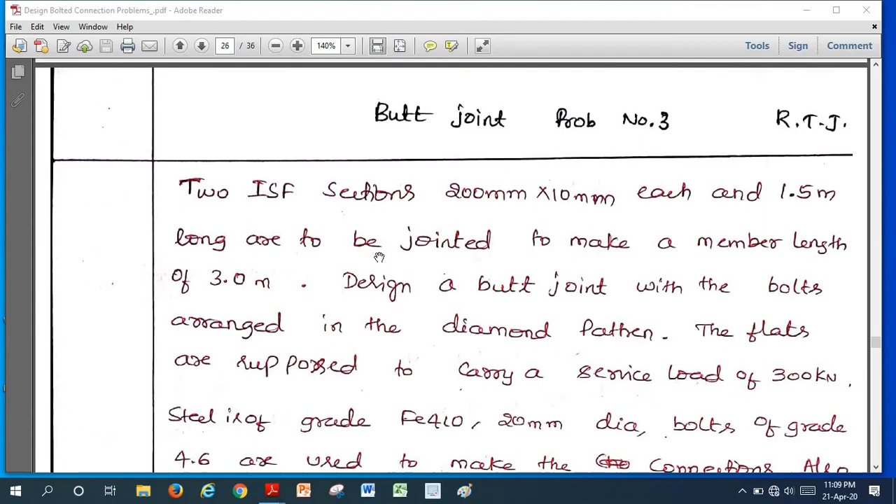Today we're going to discuss problem number 3 on butt joint. This is actually a design problem.

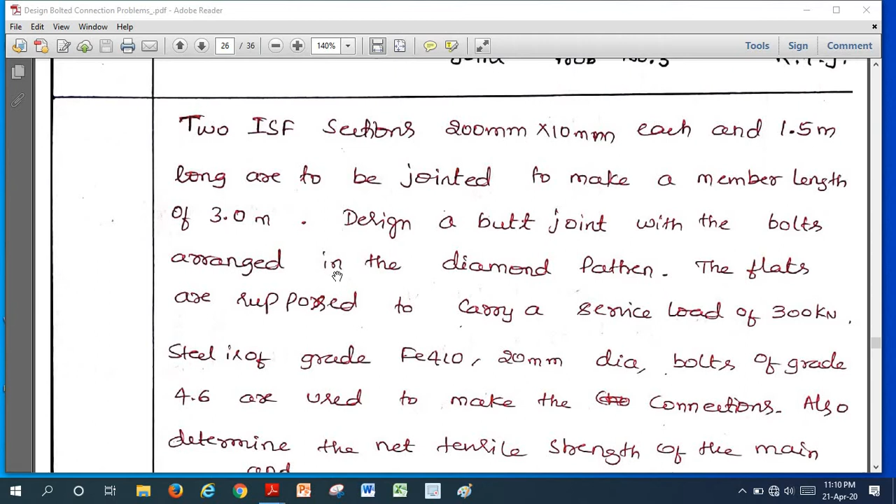Here is the problem statement. Two ISF Indian standard flat sections, that is plates, of dimension 200 mm width and 10 mm thick each, and 1.5 meter long, are to be jointed to make a member length of 3 meter. Design a butt joint with bolts arranged in diamond pattern. The flats carry a service load of 300 kN. Steel is of grade Fe410. 20 mm dia bolts of grade 4.6 are used to make the connections.

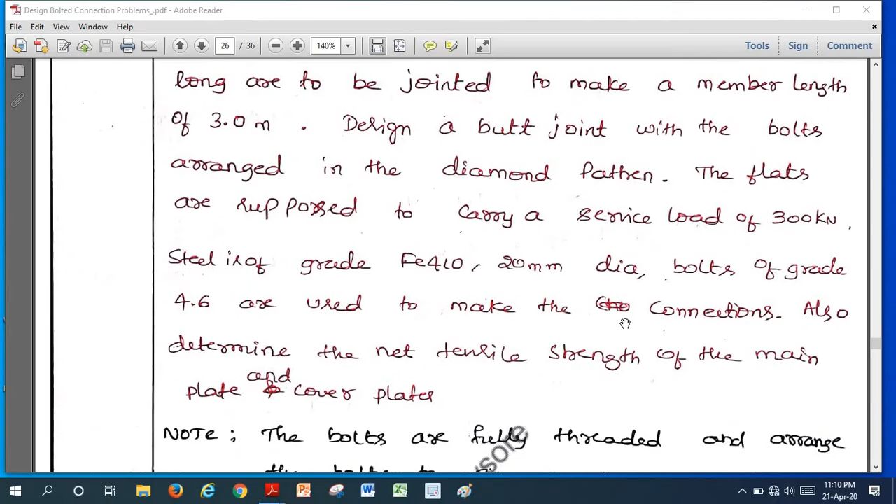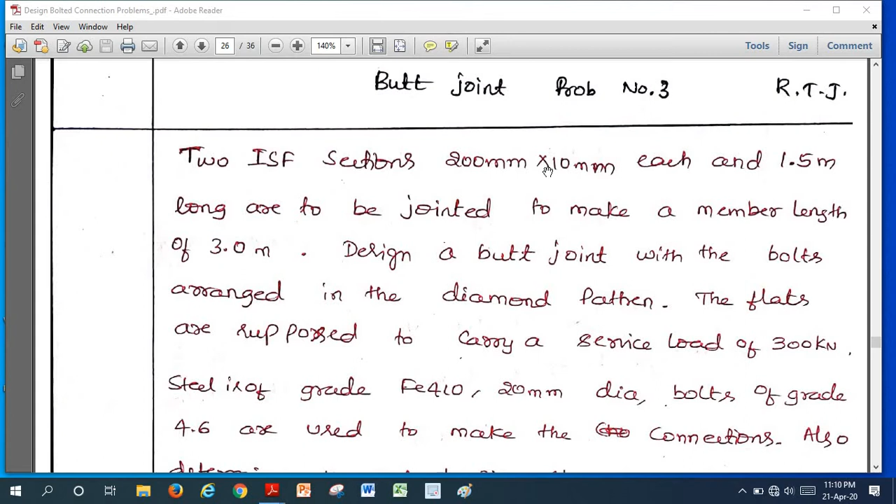Also determine the net tensile strength of the main and cover plates. This is the design problem where they intend to connect or join two Indian flat sections of dimension 200 into 10 to make one element using double cover butt joint.

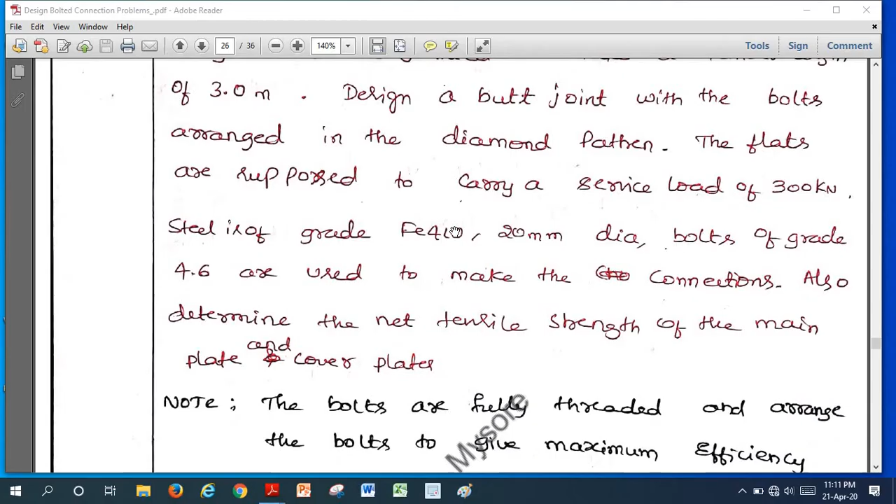We need to arrange the bolts after designing, calculating number of bolts, pitch and everything, in diamond pattern. Diamond pattern gives maximum efficiency. In the last problem we arranged the bolts in a rectangular pattern. If you arrange them in diamond pattern, it gives maximum efficiency to transfer the maximum load from one section to the other.

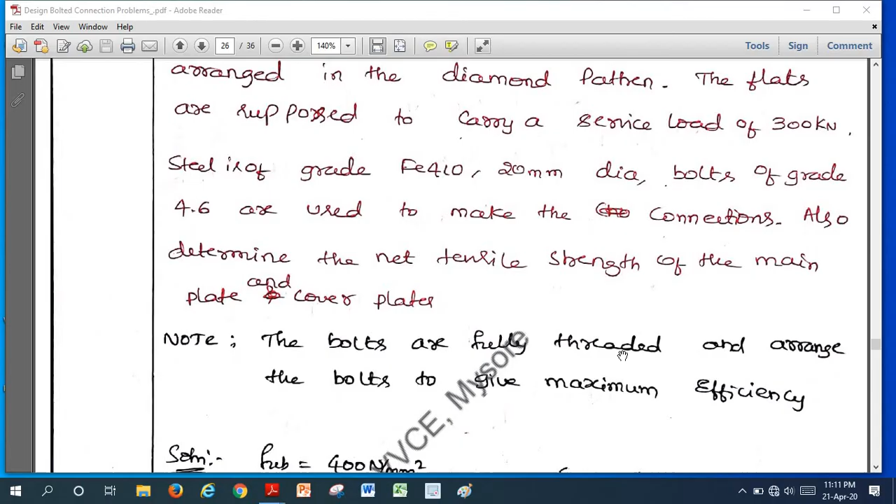Here they note that the bolts are fully threaded, meaning there is no shank portion. While calculating shear capacity, we should take NS as 0, and we should arrange the bolts in diamond pattern to get maximum efficiency.

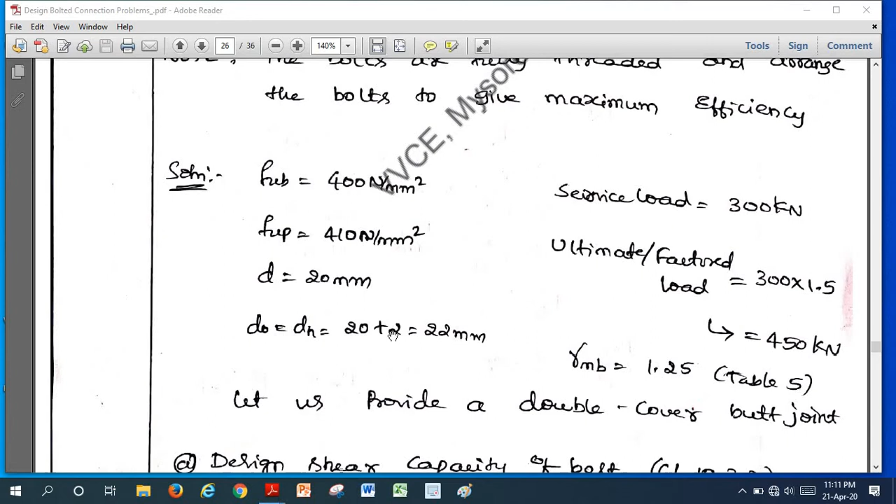If you write the given data: bolt grade 4.6 gives 400 Newton per millimeter square, Fe410 steel gives 410 Newton per millimeter square, diameter of the bolt 20 mm, diameter of the bolt hole - if you look at table number 19, you get clearance, which gives 22 mm.

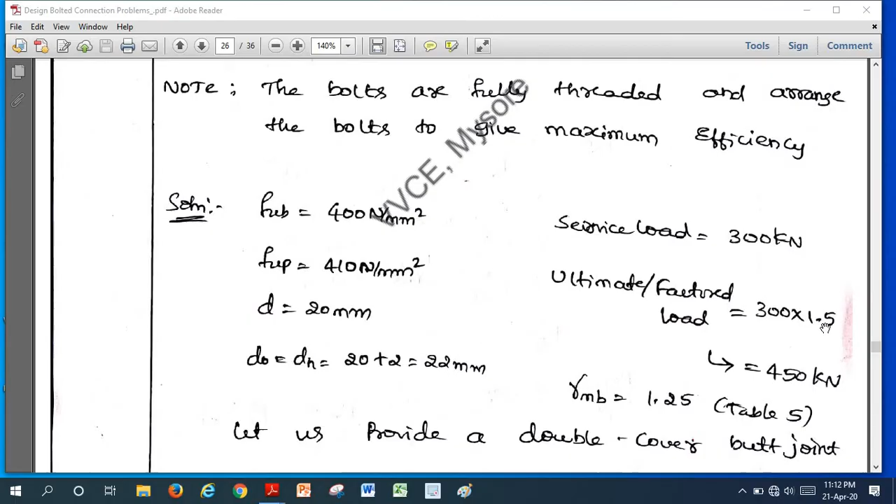Here they give service load or working load. We need to multiply by load factor, the partial safety factor for load, that is 1.5, to get ultimate or factored load. Service load into 1.5 gives the ultimate load. For this load we need to design the connection.

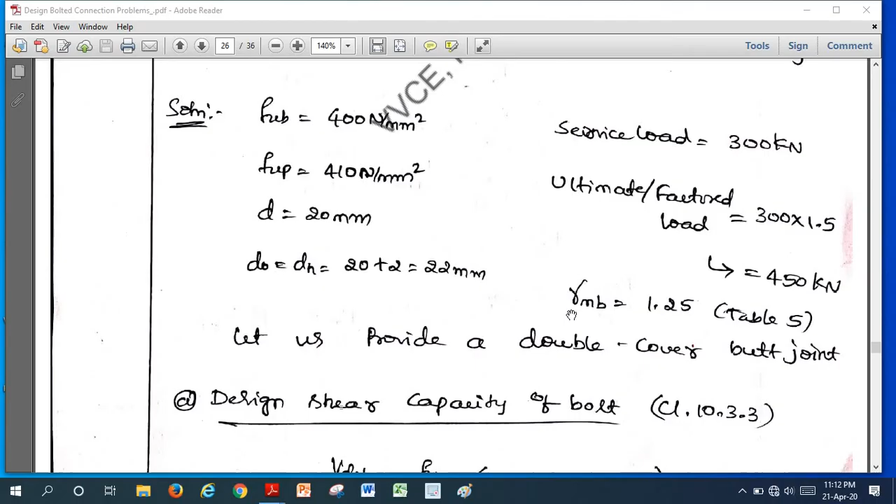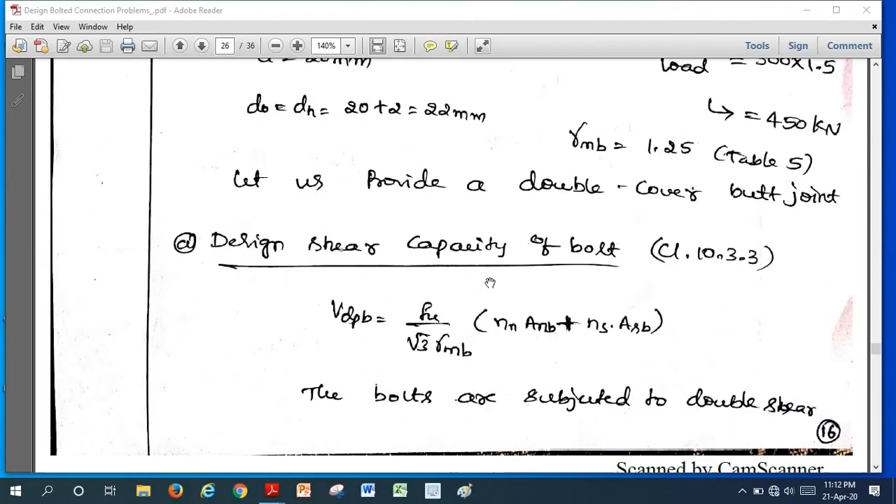Gamma MB is 1.25, we look into table number 5 of IS 800 2007. Now I have decided to provide a double cover butt joint here. So to design any joint, we should know the bolt value first, that is the capacity of a single bolt.

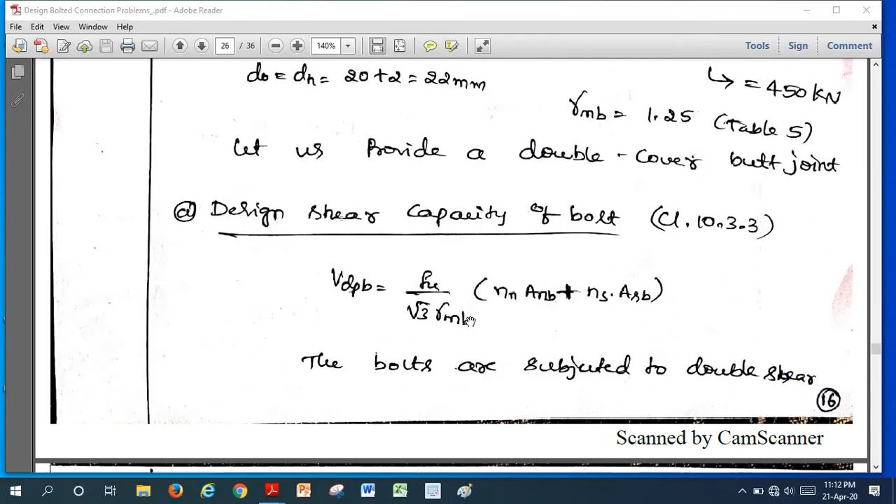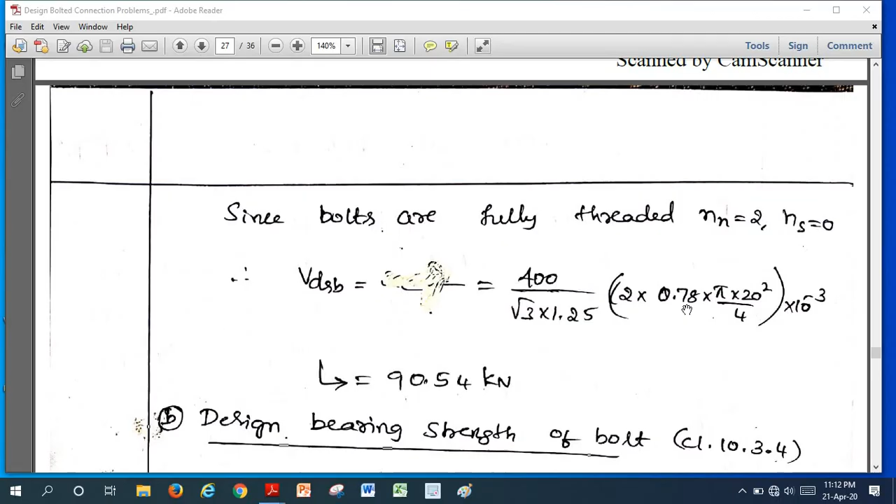Similar to the last problem, if you calculate shear capacity of the bolt according to 10.3.3, here is the formula. The bolts are in double shear, so we take n equal to 2. Since the bolts are fully threaded, NS becomes 0. If you substitute the values for Anb, 78% of Asb, Fu by root 3 gamma MB, you get 90.54 kilonewton. This is the single bolt value in double shear.

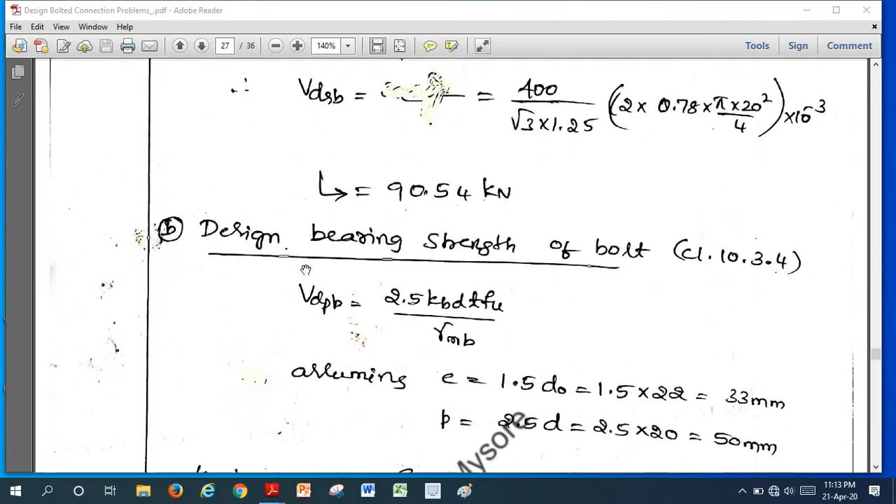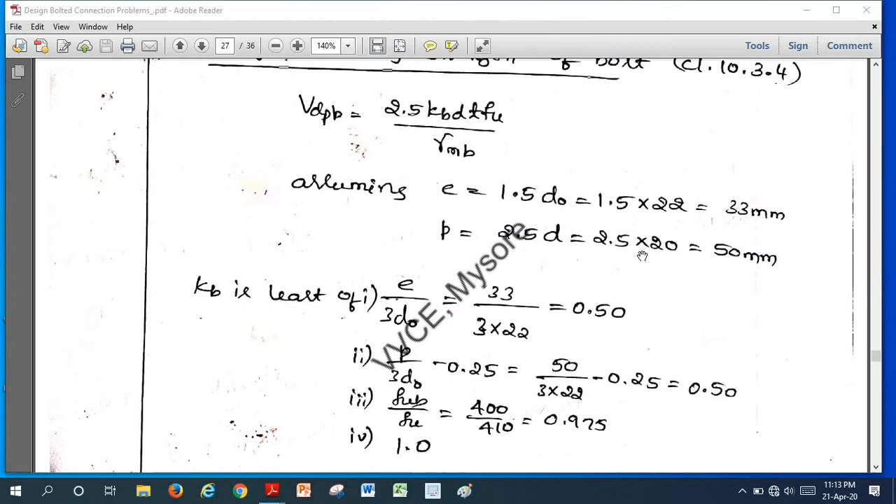If you calculate bearing strength of the bolt according to clause 10.3.4, here is the formula. We assume e as 1.5 times D naught, pitch as 2.5 times D according to the code. If you calculate Kb, it is the least of these four values, which comes out to 0.50.

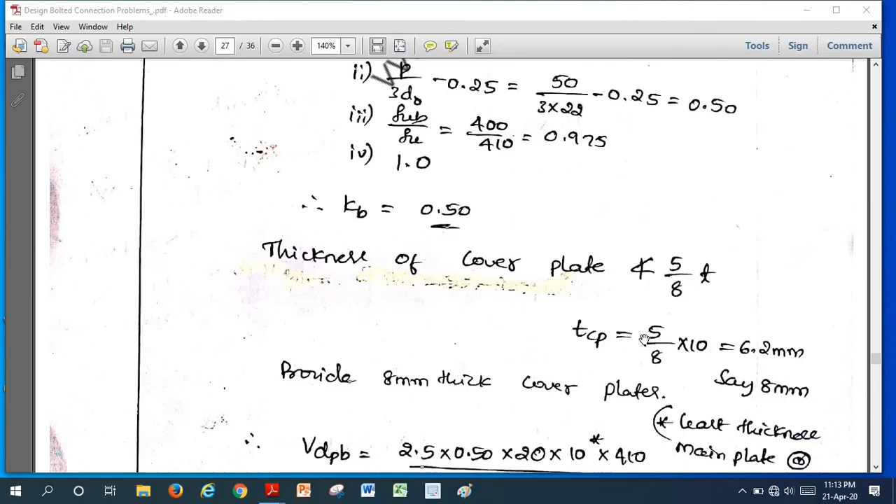Since we don't know the cover plate thickness, we should provide it such that the cover plate thickness is not less than 5/8 times the thickness of the main plate. Main plate here is 10 mm, so if you calculate, you get approximately 8 mm cover plates.

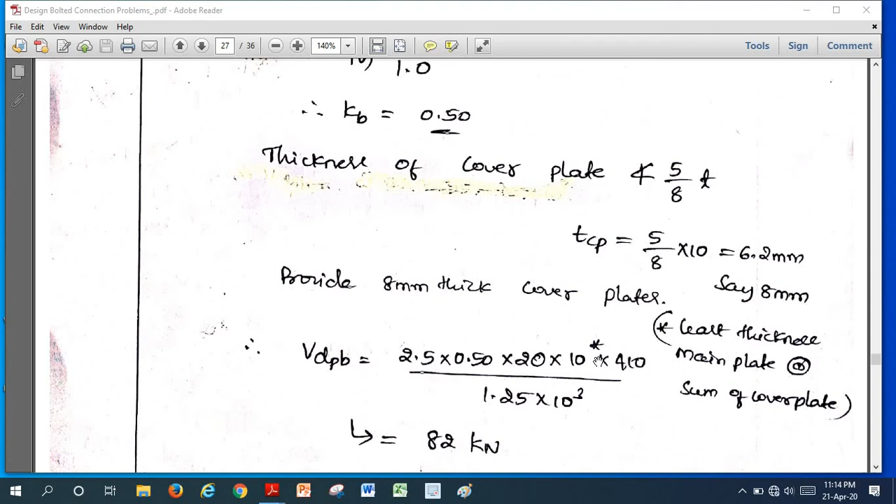We need to provide cover plates above and below since we are providing a double cover butt joint. If you substitute in the Vdpb formula, 2.5 kb diameter t, here we should take the sum of cover plate thickness or main plate thickness, whichever is least. Main plate thickness is 10 mm, cover plate thickness is 8 plus 8 becomes 16. Therefore we need to take the least value, that is 10 mm.

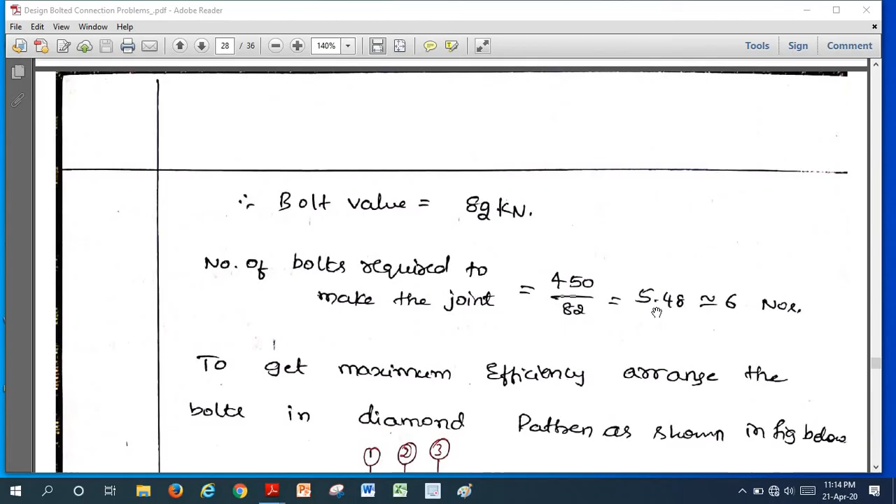So we get 82 kilonewton. Now the bolt value is the least of the two, shear strength and bearing strength. Here the bearing strength is 82 kilonewton. Therefore number of bolts required to make the joint is factored load divided by bolt value, giving 5.48, say 6 numbers.

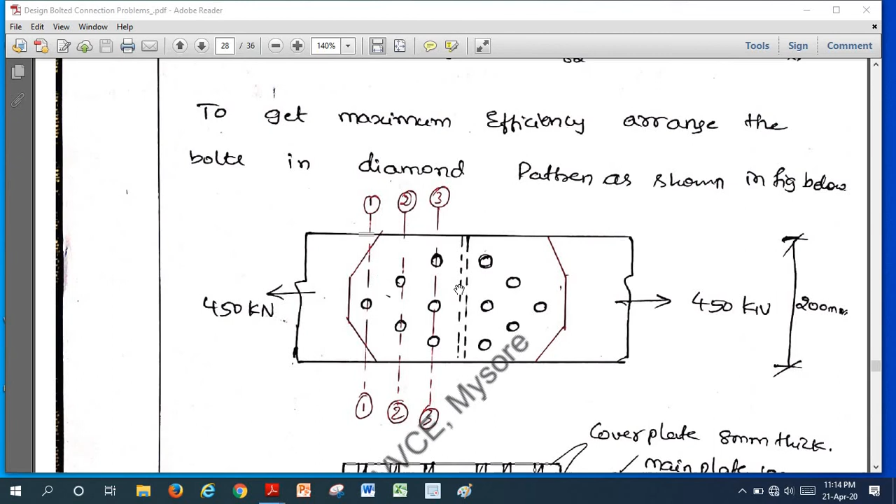Now to get maximum efficiency, we need to arrange the bolts in diamond pattern. These 6 numbers we need to provide for the half section of the joint. Total we need to provide 12, if we club both sides. The value we calculated, this many bolts, we should provide on one side, that is 6 bolts in diamond pattern. This is the cover plate, this is the main plate.

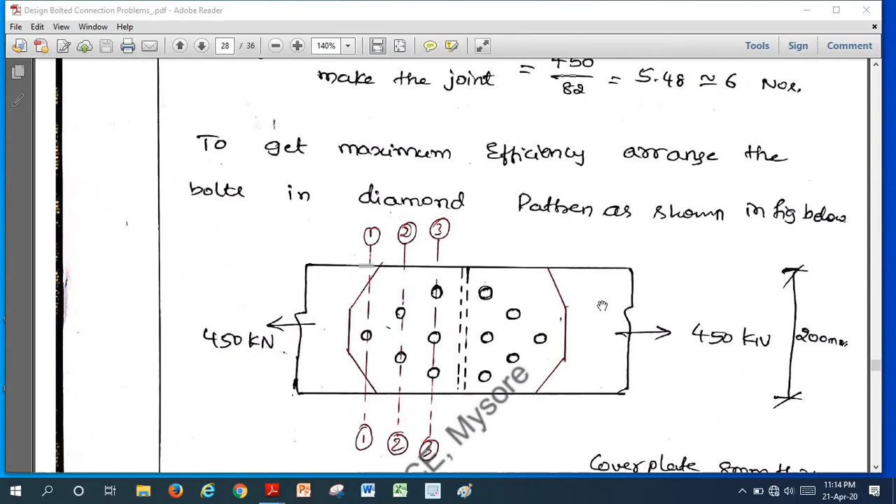The width of the main plate is 200 millimeter, the given thickness is 10 millimeter. In this other view, I have provided 3 rows of bolts with 6 numbers. Now this is the design.

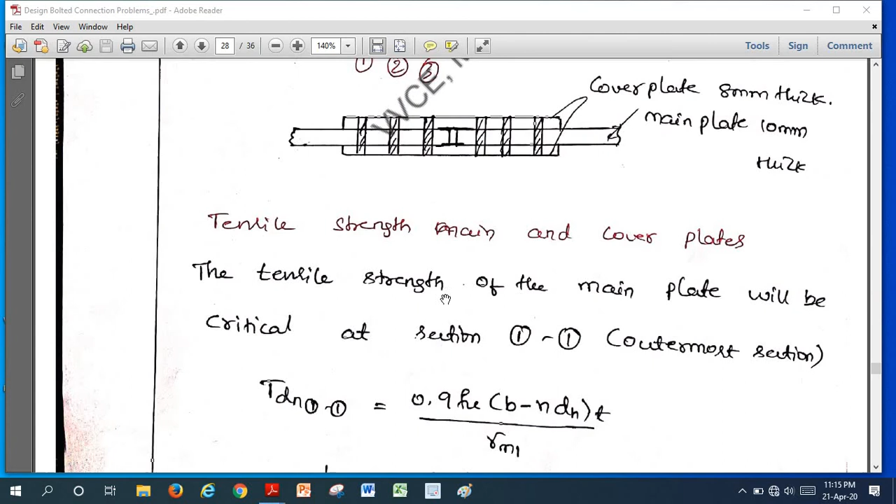Since they asked for tensile strength of the main and cover plate, the tensile strength of the main plate will be critical at section 1-1. For the main plate, this section is critical. Therefore, if you calculate tensile strength there, we know the formula according to 6.3.1 of IS 800 2007: TDN equal to 0.9 FU AN T by gamma M1.

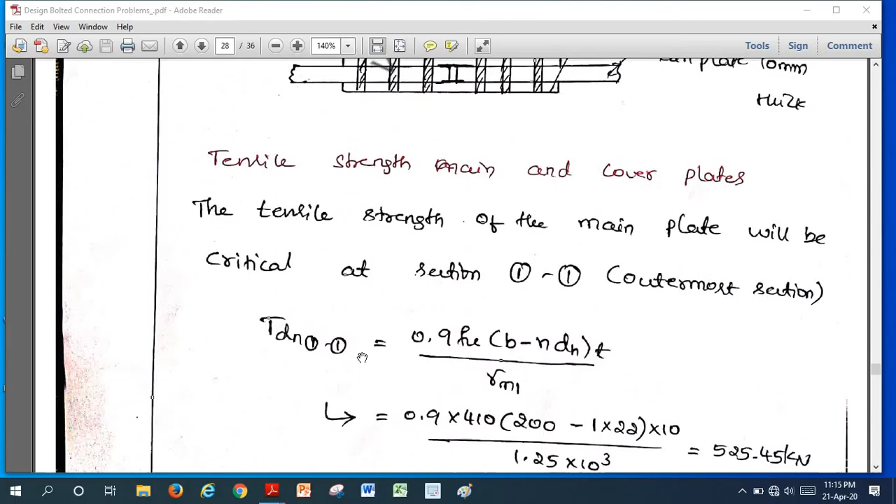AN is B minus N times DH, B is 200, N is the number of bolts passing through this section, only 1, and diameter of the bolt hole is 22, thickness of the main plate is 10 mm. Therefore we get 525.45 kilonewton.

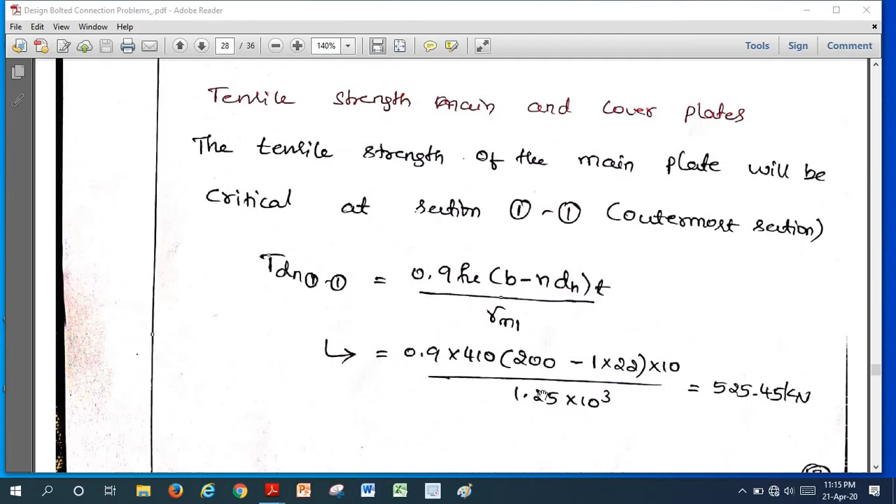We should take gamma M1 from the code book again, table number 5. Now, if you calculate the cover plate tensile strength, the cover plate is critical at section 3-3. This section is critical because they have removed 3 bolts' area here. So if you come to the main plate, it is very strong at 3-3, weak at 1-1.

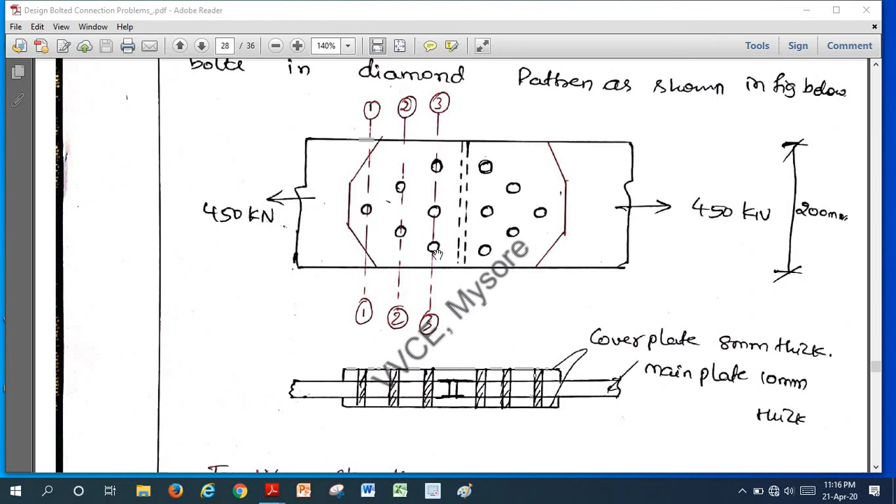Whereas the cover plate is critical at section 3-3, and the cover plate is strong at section 1-1. So here we should consider 3-3. Number of bolts passing through this section is 3. Therefore N becomes 3, diameter becomes 22, width of the plate is 200.

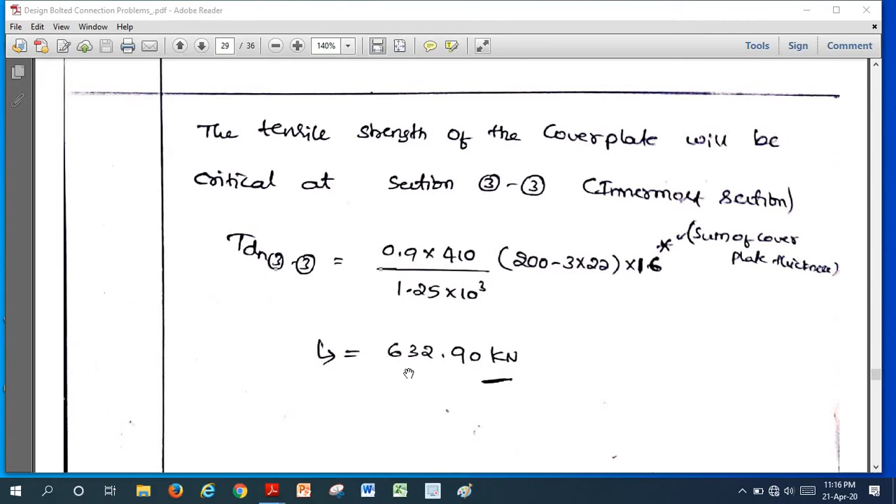Here we should take the sum of cover plate thickness. Since we are calculating the cover plate strength, we should take the cover plate thickness here. We should be careful to take this value. The TDN value is 632.90 kilonewton.